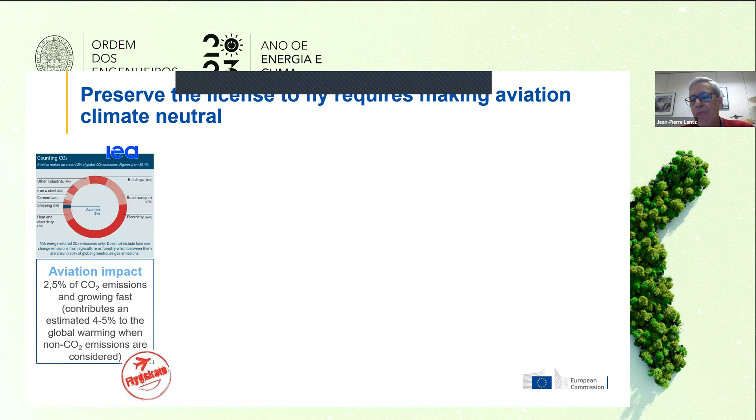As you know, the starting point is that aviation contributes around 4% of total global warming, and that contribution is growing fast, much faster than in other sectors. Therefore, aviation is a bit on the scene, even if the share is low. There is an effort to be done by the sector to become climate neutral if it wants to preserve the license to fly. Especially in the northern part of Europe, there is a tendency to have a certain flight shame, what they call flygskam in Sweden, where people are trying to fly less because of the climatic impact of aviation. So that's the starting point.

Aviation must decarbonize even more, must reduce all kinds of emissions, including NOx, including water vapor, which may also have an effect on the climate. The aviation community is indeed very much committed to reach net zero CO2 emissions by 2050. The industry shown this commitment by signing the Toulouse Declaration prepared last year under the French presidency of the Union. The industry also issued, and when I say the industry, I mean the whole aviation industry, not only the aircraft manufacturer, but also airports, airlines, the whole sector, the so-called Destination 2050 report, which presents a concrete path towards the decarbonization of the sector, indicating the feasibility of the objective and the different paths that must be followed together, because none of them alone would be enough, as already said in the introduction. So to reach net zero aviation, a whole basket of measures must be implemented.

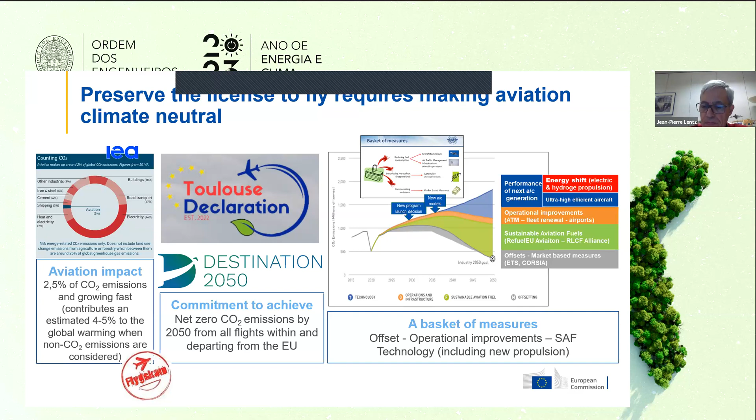But what is the subject of this talk tonight is indeed the innovation in propulsion technologies, electric and hydrogen propulsion. There are three main paths that are currently followed by the industry.

Three are based on electric motors coupled with propellers: the battery electric solution, where the power is fully supplied by batteries; the hybrid solution, which brings additional power from a turbine functioning on jet fuel or SAF; or the third solution, the fuel cell, where electricity is produced by the fuel cell. And then you have another solution, which is the direct combustion of hydrogen into the engine of the aircraft.

These developments are indeed today supported by many projects. A number were already mentioned in the introduction, not only from OEMs, big aircraft manufacturers like Airbus, but also a number of small SMEs and startups.

And I have to say, this is nice to see the revival of the small aviation industry in Europe. We managed basically to kill all the general aviation manufacturers over the last 20 years. And now with this new technology, with this innovation, we see new companies, small companies starting to develop an aircraft from scratch, designing an aircraft. And I think this is also very important for the sector, for the competitiveness of the sector.

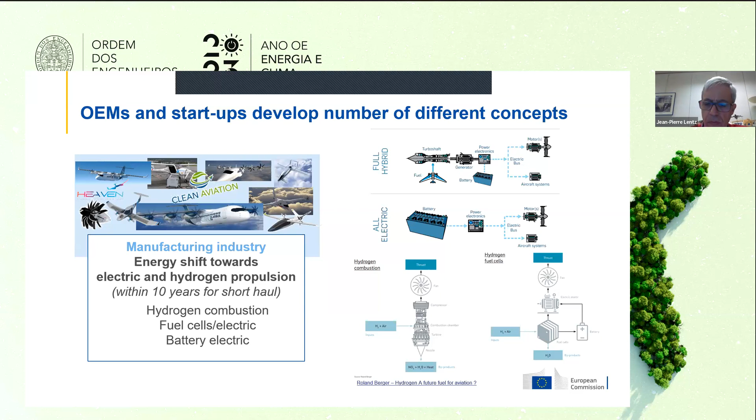As mentioned before, the industry has committed to net zero. Net zero means that the amount of CO2 removed from the atmosphere is equal to the amount which is released, but it doesn't mean that there is no CO2 emitted in the atmosphere. The removal can be done by carbon capture at the level of production.

This is basically the situation when we produce SAF, synthetic, so the e-fuel, the synthetic production of SAF from hydrogen, or by compensating the remaining emissions, as I mentioned before, through offset schemes like the ETS, or other schemes where in the past you paid for planting trees when you emit CO2.

Now, this does not, as I said, prevent the release of CO2 or greenhouse gases in the atmosphere. It is therefore important to work really on the reduction of the carbon footprint before applying those solutions. And this is why the effort made to develop innovative propulsion technology is so important.

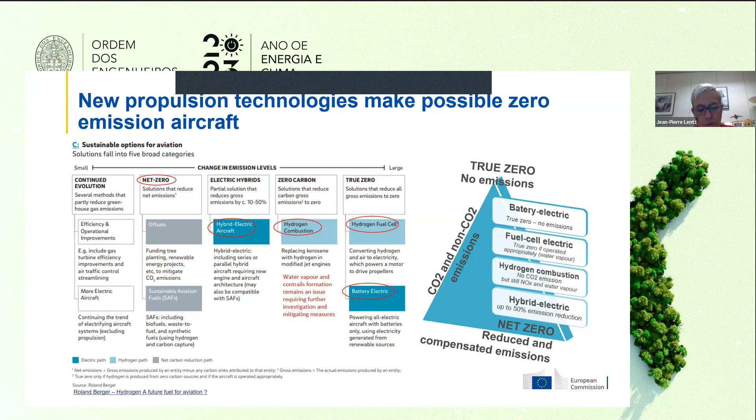And finally, with fuel cell, you will only release water vapor, and this emission may probably be mitigated by the appropriate operation of the aircraft. You know that according to the level of flight, you may have more or less formation of contrails. And finally, the solution which is truly zero, so you do not emit neither CO2 nor greenhouse gases, is the battery electric solution—of course, on the condition that the electricity and hydrogen used in these different configurations are green themselves.

Just to give a bit of an idea, this graph shows how those solutions could be implemented. You can see that they will, of course, be implemented first on smaller aircraft, and that not all solutions work for all types of aircraft.

Electric and fuel cell solutions are limited to smaller aircraft, while hydrogen combustion can be applied up to short and medium-haul aircraft, and we will come back on that. For the time being, only SAF may help decarbonizing long haul. So it's not only that SAF enables decarbonizing right now, but it also remains probably for a long time the only solution to decarbonize long haul, which represents a large part of the total climate impact of aviation.

The first small electric and fuel cell aircraft could reach the market in the coming years, as mentioned before. A number of companies are working on this, and we will have a look at different projects in a moment.

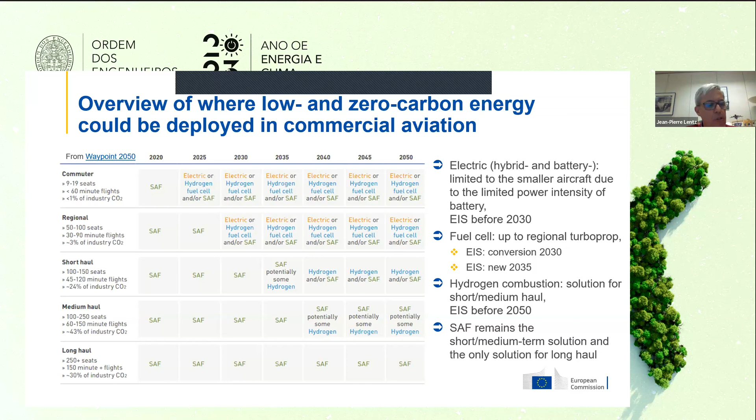So I will now go by category, presenting some of those projects just to give you an idea. These examples come from manufacturers which are members of the Alliance for Zero Emission Aviation. I just took the list, and we have more than 20 manufacturers or companies developing projects to develop or convert aircraft into electric and hydrogen aircraft. These are the projects I will present now quickly.

So here we have the battery aircraft, with on the left side the first and at the moment the only certified electric aircraft, the Pipistrel aircraft.

There is development also dealing with bigger aircraft, commuter aircraft like the VAERIDION project, up to regional aircraft of 40-50 pax, which is the biggest project I know of involving full electric propulsion. There is another project from Wright Electric.

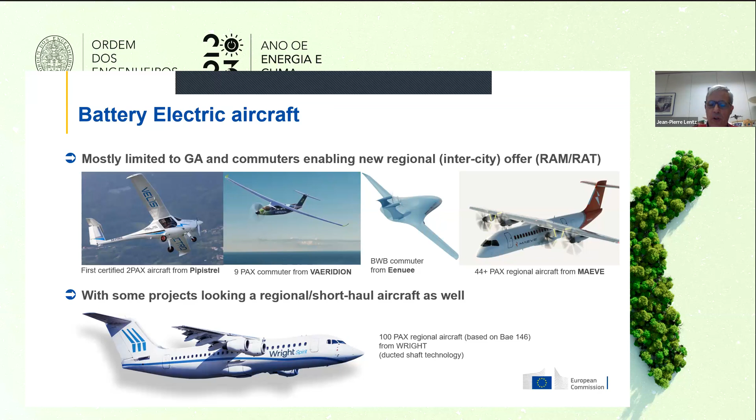This project is based on the BAe 146. They do not use a propeller, they use ducted shaft technology. So this is something a bit out of, let's say, the normal path for battery electric aircraft.

And there are other projects again in the range of the commuter. All this development of electric, battery electric, and hybrid electric aircraft is also funded by the Clean Aviation Joint Undertaking, a large development project funded under the Horizon Europe program, which has a budget of 1.7 billion euros from the Commission side, and the industry is putting on top of that something like 3.5 billion euros, so a big development project.

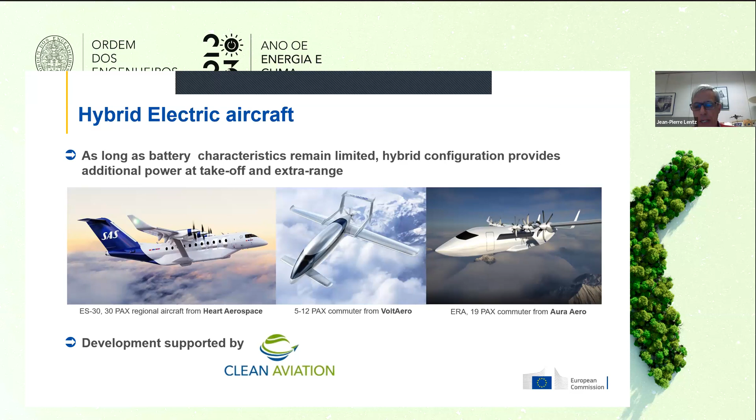What is also interesting with electric propulsion is that it allows new configurations to be developed, in particular the vertical takeoff and landing configuration. Different configurations exist, of course the well-known multi-rotor configuration of the taxi drone, and these aircraft will support the development of urban air mobility with automatic or unmanned aircraft at the end.

Now there is also VTOL configuration combined with a fixed wing approach. The Lilium is a bit in this category, and the Ascendance Flight is really in that category. These aircraft are targeting intercity operation, what is called regional air mobility.

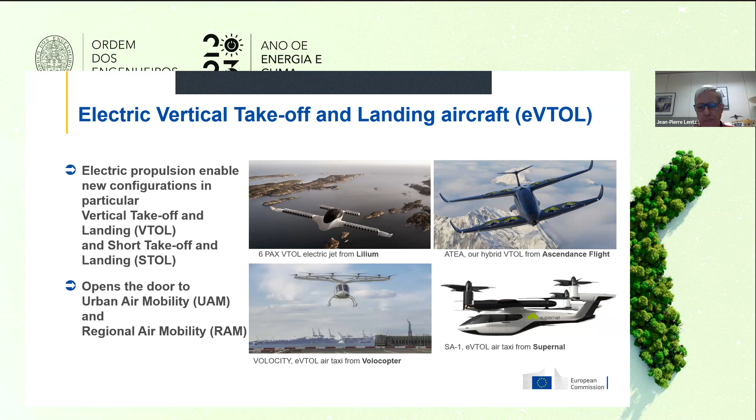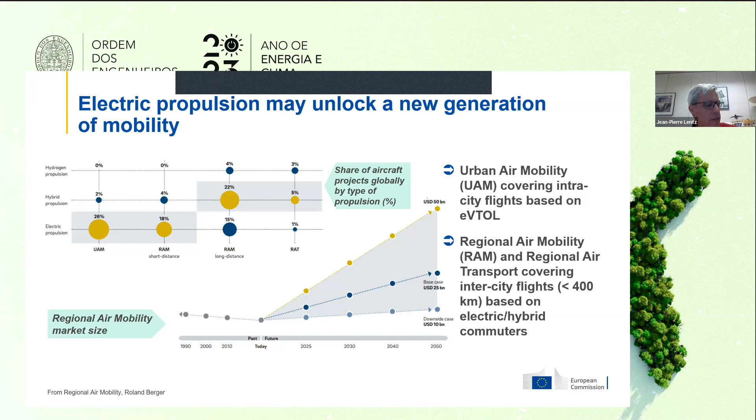This is really an opportunity that electric propulsion provides. The so-called RAM/RAT is a market that could emerge, and actually is emerging in another part of Europe, because there is a big need for short distance transport, but in sometimes strong weather conditions, where roads or train may be much more difficult to utilize. So a big opportunity provided by electric propulsion to create new mobility offer.

On the other side, hydrogen is really the propulsion mode that may play an important role in the decarbonization of intra-EU flight. On this picture, taken from the Destination 2050 report I mentioned before, you see that the study foresees that hydrogen combustion or hydrogen fuel cells, so hydrogen propulsion, could represent up to 50% contribution to the decarbonization of intra-EU flight, because hydrogen cannot be applied to long-haul flights, but on short-haul and regional aircraft, basically covering all the intra-EU flight need, hydrogen could play an important role.

So let's have a look at the hydrogen projects. There is a lot of projects around fuel cell electric aircraft. First of all, not only aircraft, but even airships - I'll give you an example. Drones as well. Many drones are now looking at hydrogen, big and small, because again, the battery has limited capacity. There are research projects like the H2 Fly, but a lot of industrial projects in the range of small aircraft, general aviation, business aircraft, and a lot of projects, which is also interesting, from

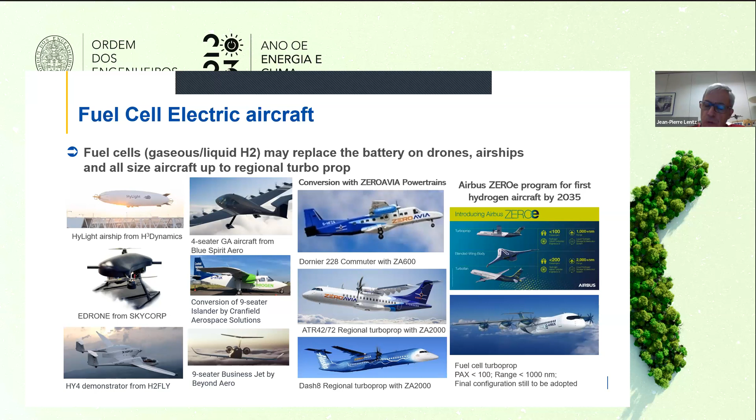At the moment, for the shorter term, so the 2035 deadline, it seems that they are orienting themselves towards a fuel cell turboprop of something like 100 PAX and a range of 1,000 nautical miles. This seems to be at the moment the direction they are taking for this first project, and they plan to take a decision to launch the project, to launch industrialization of the project and define completely the configuration around 27, 28.

And finally, hydrogen combustion. So Airbus, as I mentioned, is also working on the development of, in this case, a short medium haul aircraft. So basically, probably an aircraft of the size of the A320. And they may foresee the entry into service of this aircraft between 2040 and 2050.

On their side, CFM, so the joint venture between Safran and General Electric, they are developing a new engine under the RISE program. It will be an open rotor, as you see on the slide. So this may be really the new type of engine that will equip the next generation of aircraft. And in this context, they are also looking, it's not the main purpose of the project, but they are looking at hydrogen combustion and eventually also hybridization of the engine. And this is again an area which is supported very much by the Clean Aviation Joint Undertaking.

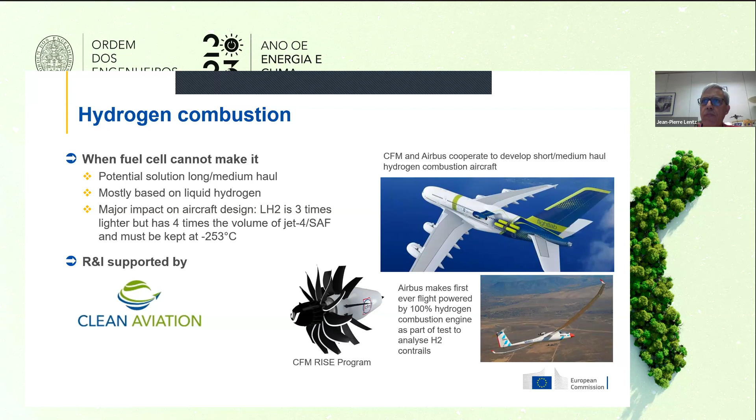So that gave you a bit of a flavor, I would say, and again, based on the members of the Alliance for Zero Emission Aviation, of the concrete projects. And you see these are industrial projects, these are companies working on this development and of course, hoping to be able to produce this aircraft rather soon.

A question, of course, concerns the supply of hydrogen to airports, because airports will have to adapt, will have to be able to supply hydrogen. In a nutshell, several options exist according to the quantity of hydrogen you need, either delivery of gaseous or liquid hydrogen. So in most of the projects I showed you, liquid hydrogen is used, but some are still using gaseous hydrogen. So you may have direct delivery by truck when the quantity is not important, so that will probably be the first solution applied.

Then you may, when you need more energy - and this important amount of hydrogen will basically be necessary for, I would say, the Airbus aircraft, so the turboprop, and even much more later if we have a short medium haul aircraft.

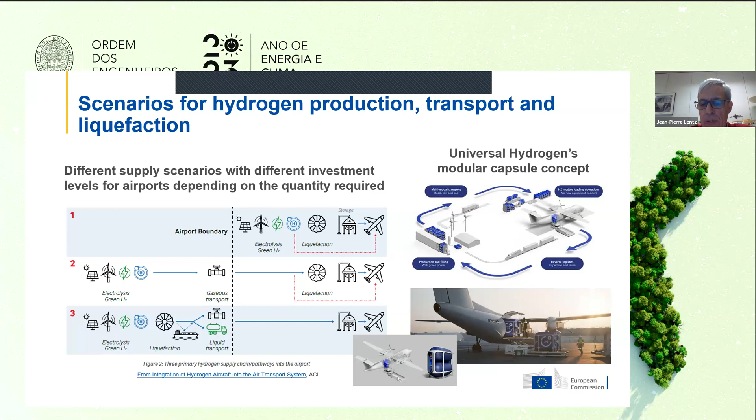Airports are themselves very much into the decarbonization of their activities. There is the airport carbon accreditation developed by ACI, and there are already many airports in Europe. In fact, the percentage of airports having entered this accreditation scheme is higher in Europe. There are different levels of accreditation. They are looking at their own process, and you can see on the slide the different processes you have at the airport.

What is interesting is that they are looking both at electricity and hydrogen. For hydrogen, this is also a first step in the direction of providing hydrogen for aircraft, because they are already looking at hydrogen for other applications, either for vehicles at the airport, or many airports are starting to see themselves as an energy or hydrogen hub for a number of activities developing around the airport. You have, of course, the transportation to the airport, so the buses, the trucks. You may have also some local industry and other activities that could benefit from hydrogen that would be brought or even produced at the airport. So airports are looking at decarbonization. In this context, they are looking at hydrogen, and this is a first step also to prepare them for the later handling of hydrogen aircraft when needed.

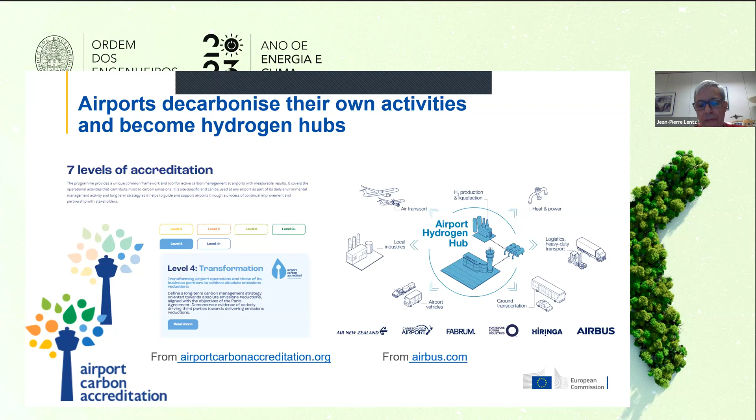Now, this is nice to have this technology, even to have industries developing projects, and obviously hoping to be able to place these aircraft on the market. But as you may well understand, if you had a hydrogen aircraft at the Lisbon airport or the Porto airport, it would stay there, and I would only be able to see it when I come back for the holidays in summer, because you cannot operate this kind of aircraft today in the current aviation ecosystem.

We conducted a quick survey two years ago just to get an impression of the challenges, and everybody could name them - they are quite obvious. Beyond the aircraft technology, you have the question of certification, legislation, standardization. You have the question of ground infrastructure, financing, the supply of energy - electricity or hydrogen, the impact on air traffic management, the operating concept of these aircraft, market acceptance, the skills needed for maintenance, for instance, and many others. So a lot of different subjects to be addressed in a coherent way. Otherwise, you do not manage to prepare your ecosystem correctly for this new aircraft.

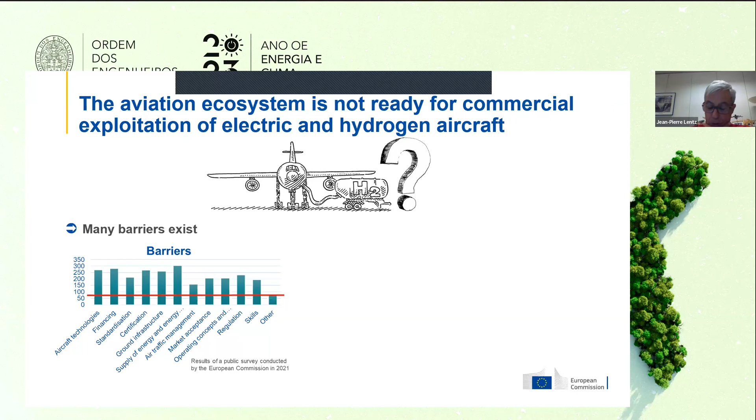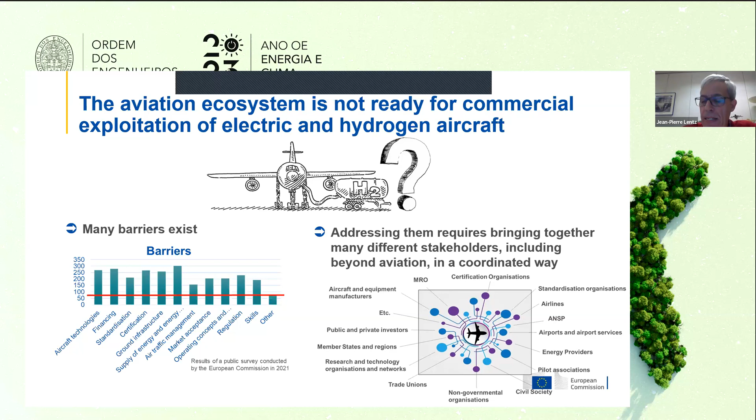And therefore, you need to bring the different stakeholders together. You have some of them on the slide, but really very different people. Of course, we have the airport operators, the airlines, the manufacturers, which are at the core of the aviation community, but you also have energy providers and many others you need to bring around the table to address these challenges. This is the reason why we have decided now to launch this alliance. The alliance is a concept we created at the Commission a few years ago, and we already developed it for hydrogen, for battery production, for sustainable aviation fuel production, and many other challenges like that, where you bring all the stakeholders together in order to identify the challenge and identify recommendations and actions to address them in a coherent way.

So the purpose of this alliance is to prepare the aviation ecosystem for the entry into service of electric and hydrogen aircraft, to deliver all the benefits, which are obviously environmental, societal, also with these new mobility modes, and industrial benefits we also mentioned, because we have this really new type of small companies emerging again, and also we support Airbus, of course, to maintain its leadership on the global market.

The purpose will be, on one side, to foster the synergies of all the different stakeholders around a common vision, and then issue a kind of roadmap with recommendations to address the barriers.

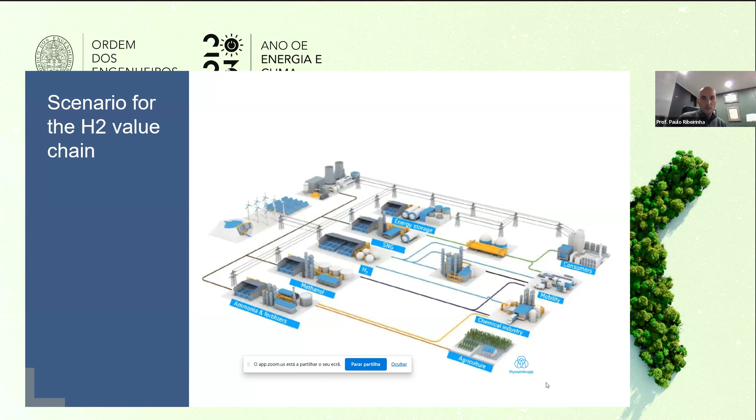Aqui é um bocadinho o diagrama anterior, mas traz aqui mais especificamente o que é que nós podemos fazer com o hidrogênio. Obviamente que temos a produção a partir de fontes renováveis, depois temos aqui a conversão através da eletrólise e ficamos com hidrogênio e oxigênio. Isto estamos a falar de eletrólise da água.

O hidrogênio, obviamente, é interessante, que é o combustível, mas o oxigênio também tem valor económico, também poderá ser utilizado, uma vez que o oxigênio pode ser até utilizado para aumentar a eficiência de sistemas de caldeiras, aumentando a eficiência do queimador. Depois o hidrogênio pode ser então canalizado, distribuído através de bombas de gasolina e depois com aplicações finais no transporte. Claro que o transporte é abrangente, desde o transporte terrestre, marítimo e aéreo.

Mas depois, em termos da parte do transporte, o que é que nós podemos fazer com o hidrogênio? Nós podemos essencialmente converter o hidrogênio para algo que é inerentemente mais interessante. Podemos convertê-lo para metanol. Aqui está MTG, isto é methanol to gasoline, ou seja, utilizando o metanol podemos converter para gasolina ou para um tipo de gasolina, o que torna o hidrogênio mais interessante, porque aumentamos aqui de forma significativa a densidade energética deste combustível.

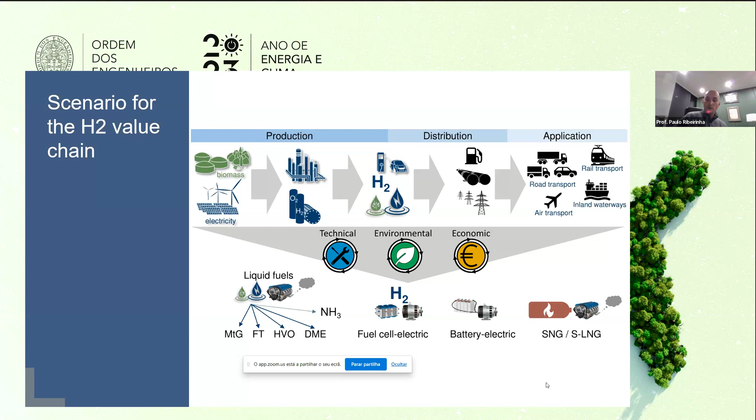A AmnisPura, nesta cadeia de valor, localiza-se no processo de purificação, porque independentemente do processo que se usa para produzir o hidrogênio, há sempre um processo de purificação que ocorre. Mesmo quando nós produzimos hidrogênio a partir da eletrólise da água, esse hidrogênio vem contaminado. Obviamente que a contaminação não é grave, a contaminação é a própria água. No entanto, quando queremos utilizar esse hidrogênio, essa água tem que ser removida, porque tipicamente os processos que estão a jusante do eletrolisador requerem uma compressão, e não podemos comprimir um gás que está saturado em água.

Portanto, é necessário fazer uma remoção, uma secagem desse hidrogênio. Todos os outros processos, como a reformação do biometano, a gasificação, ou mesmo o chamado ammonia cracking, que é a quebra da molécula de amoníaco para o hidrogênio, todos eles têm contaminantes durante o processo que precisam ser removidos. Portanto, temos aqui esta citação: whatever the route taken to produce hydrogen, a purification step is always necessary.

Em termos de empresa, ela foi fundada em 2018, como uma spin-off da Faculdade de Engenharia. Naquela altura participamos de uma série de projetos europeus, e foi essa participação que de uma forma nos levou a entender e a perceber a importância do hidrogênio nos mercados futuros. Tivemos alguns projetos, também foi desenvolvido um adsorvente que facilitava alguns processos de purificação, nomeadamente a remoção do monóxido de carbono das correntes de hidrogênio.

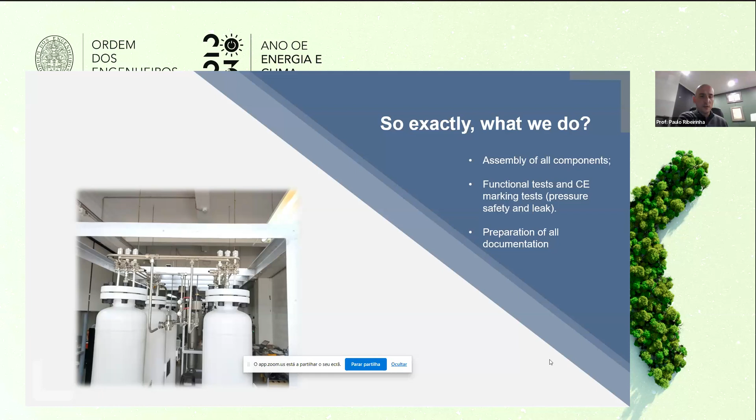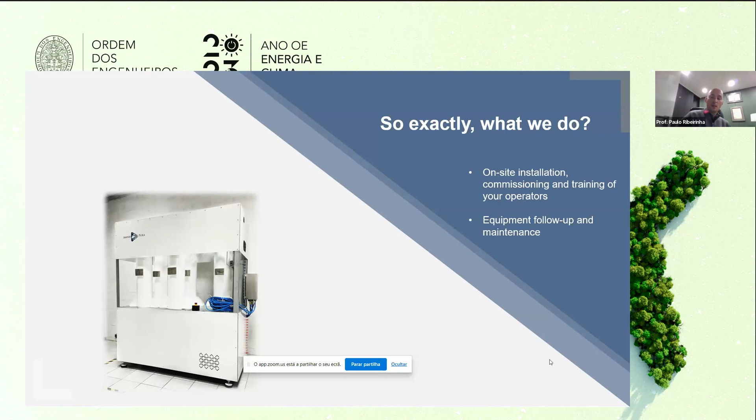Por fim, o equipamento é enviado para o cliente e quase sempre nós temos que fazer a instalação da máquina on-site, porque apesar de ser um sistema independente do que ocorre a montante e jusante, há uma necessidade de integração do nosso sistema com os processos. E depois fazemos aqui, obviamente, também o follow-up do equipamento e a sua manutenção.

Em termos de equipa de gestão, sou eu, Paulo Ribeirinho, como diretor e CEO da empresa, Frederico Ralvas é o CTO e temos aqui o Michael Weber, que é o diretor e representante da Witzmann na empresa.

Mais uma quote aqui da parte da empresa, que é: Remember, the future must be purified. E é tudo, obrigado.

Muito bem, muito obrigado, professor Paulo Ribeirinha. Uma apresentação muito compreensível daquilo que se está a fazer em Portugal e que é muito importante. Aqui algumas questões para si.

Pergunta a Teresa Ramírez: que tipo de eletrolisador vai utilizar a Prio na sua nova unidade em Setúbal? Em princípio será tecnologia alcalina. Ainda não está fechado, mas em princípio será alcalina.

Pergunta ao David Diniz: qual a produção de H2 por gaseificação em Portugal? Nós não temos neste momento nenhum gasificador em Portugal. Infelizmente, Portugal vai um bocadinho a reboque, ou seja, só quando as tecnologias estão desenvolvidas noutros países, ou a sua utilização é garantida, que nós vamos a seguir, e compramos a tecnologia. E isso foi uma das coisas que me preocupa e que me fez também avançar com a criação da empresa, para não sermos só os compradores de tecnologia, mas sermos os developers da tecnologia.

Muito bem. É preciso estar na cadeia de valor.

Última pergunta, diz o Albano Rosa: o hidrogênio tem baixa densidade, escapa-se por qualquer poro, por menor que seja o diâmetro. O seu uso como combustível nos aviões não aumentará o risco de acidente? Eu tinha dito, eu não sou apologista do hidrogênio na forma de hidrogênio puro. Tudo que foi dito é verdade: ele é altamente fugaz, tem baixa densidade energética, e é bastante reativo. Por isso é que eu acho que o hidrogênio sim, mas como vetor energético, no meio de uma cadeia de valor, para produzir algo mais interessante, como os SAFs, os metanóis e os DMEs.